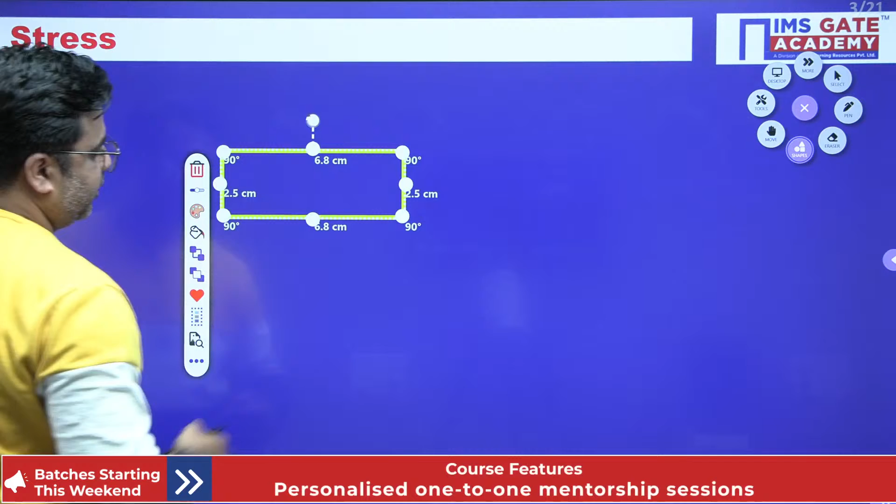Let us see this. Suppose this is my body, over this body I have applied some amount of load. This is the load that I have applied over this body. And which type of loading is this? This is a gradually applied load that we have already seen.

When you apply load over this body, it will try to undergo deformation, like this. This is the deformed shape of the body. In order to restrain this elongation or deformation, this body will provide the restraining force.

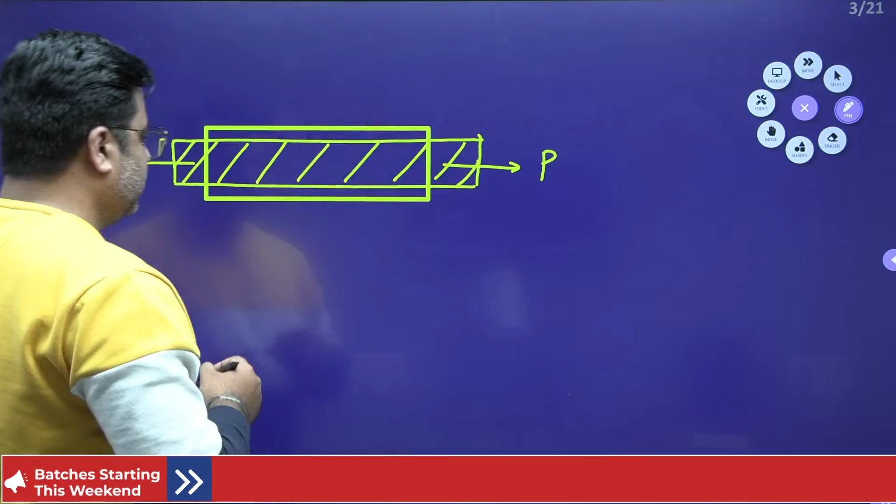So the restraining force that this body will provide - if you look into this cross section, in order to restrict whatever this load is doing to this body, there will be some internal resisting force that develops in the body like this. This internal resisting force will resist the effect caused by this external load P.

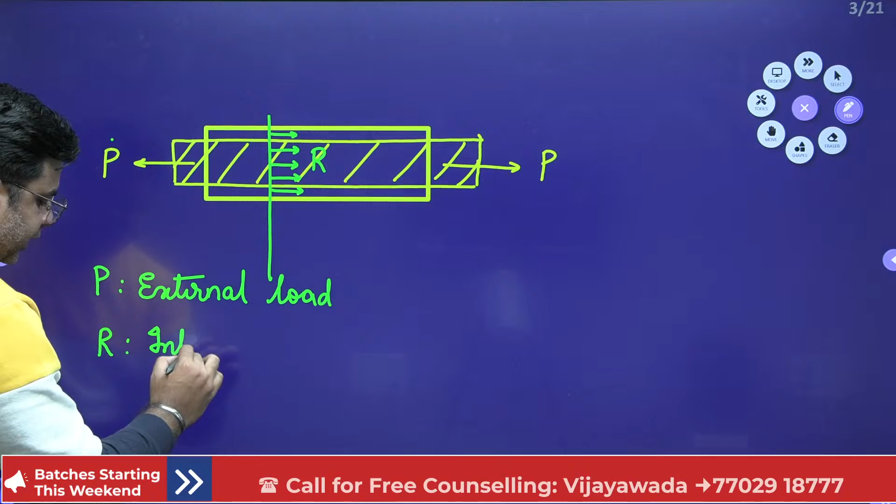P is my external load or external force, and R is the internal resisting force. This internal resisting force is developed to restrict the deformation of the body, which is caused by this external load.

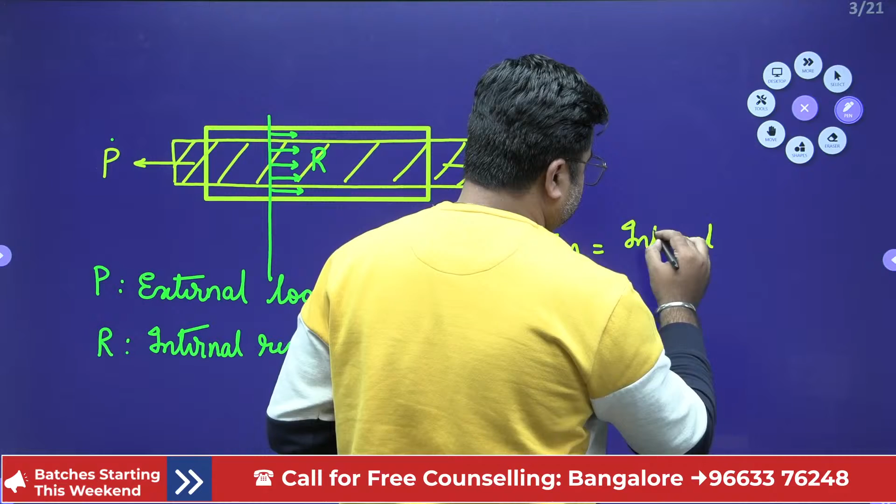This internal resisting force per unit area is termed as stress. So what is stress? Stress is internal resisting force per unit area.

Now, if you just consider the equilibrium of this system - this is my system, this is the section, this is the external load P. In order to restrict this deformation caused by this external load P, internal resisting force will develop inside this body. This is my internal resisting force.

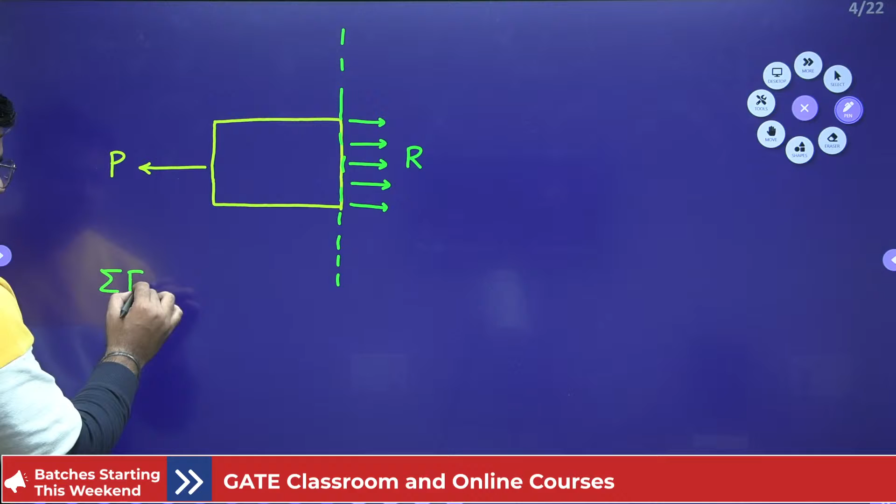Also, at the same time, the body should be in static equilibrium, which means that summation of horizontal forces should be equal to 0, which gives us P should be equal to R. So the internal resisting force is equal to the external load applied. That's why we write stress equals load divided by area.

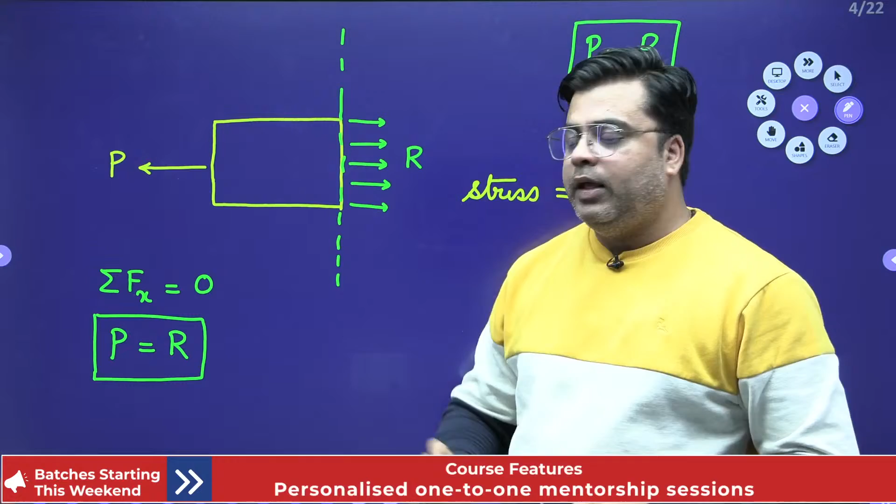Because this external load P is equal to the internal resisting force R, that's why we write this formula. But what happens usually is, when students see this formula, they try to figure out that stress is nothing but whatever load is applied per unit area. No. If I talk about the external load, external load per unit area is termed as pressure. But the internal resisting force per unit area is termed as stress.

I hope you got this clarity on this topic. So next time, if you see any statement in any technical examination, not just GATE, asking what is stress or to define stress, never mark it as load per unit area.

It will always be internal resisting force per unit area, and that is what we mean by stress. On the other hand, if I have to write pressure, pressure is external load per unit area. So this is the basic difference between stress and pressure: stress is internal resisting force per unit area, and pressure is external load per unit area.

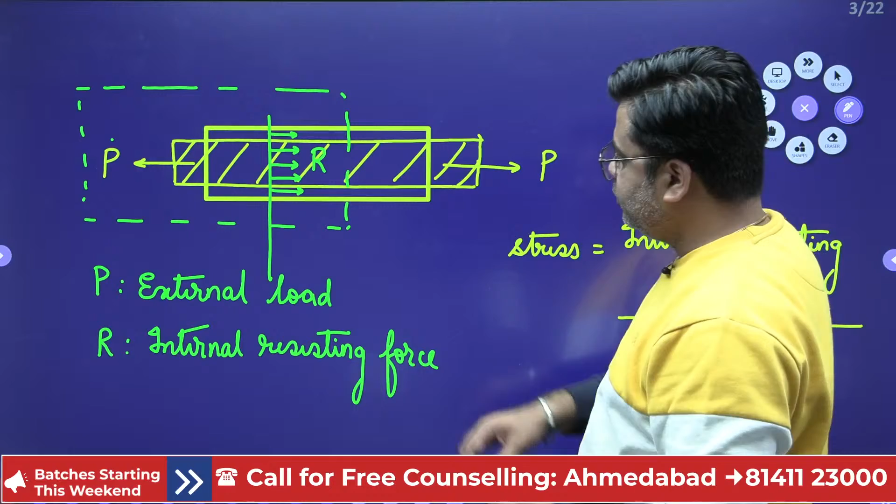Now, if you look into this diagram carefully, you will notice that initially the area of the section was A naught. Initially, this is my initial area, the area of the section was A naught.

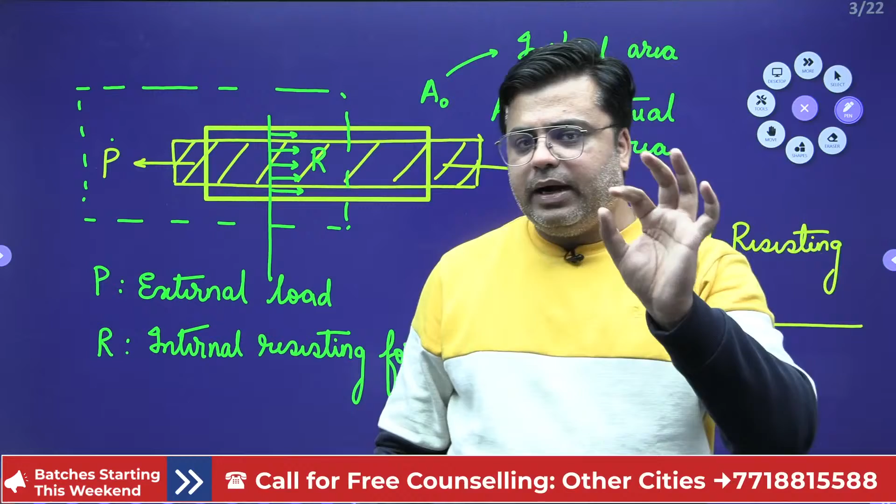When you apply the external load, this body undergoes deformation and some change in cross-sectional area is seen. So the instantaneous area is termed as A actual. This AA is nothing but the actual area when the body has undergone deformation, or the instantaneous area when the body is undergoing deformation. Meaning, at any time when the body undergoes deformation, the actual area is AA. The original area is A naught.

So the next question comes: sir, which area to use? You have told us that stress is nothing but internal resisting force per unit area, but which area to use, actual area or initial area? That is again one of the questions that usually confuses students.

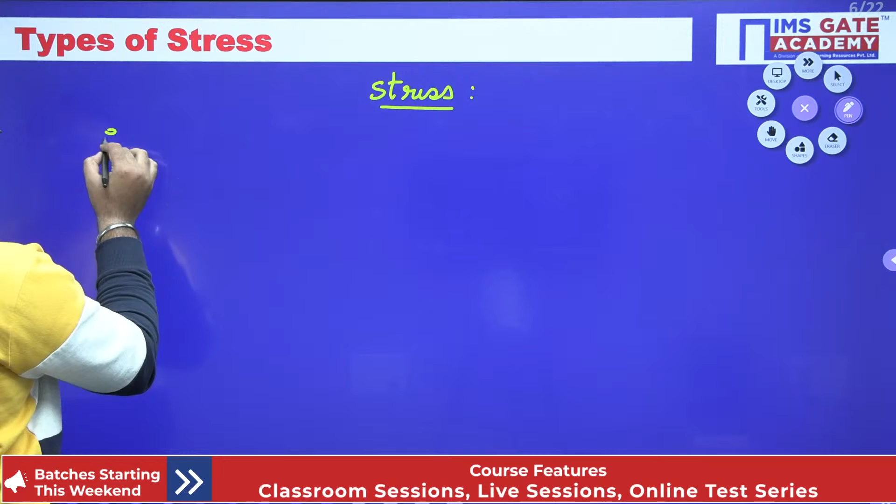Okay, so depending on the type of area we are using to calculate the stress, stress is defined differently. So the next topic of discussion is different types of stress. Depending on the type of area you are using, stresses are defined as two types. The first one is known as engineering stress or nominal stress.

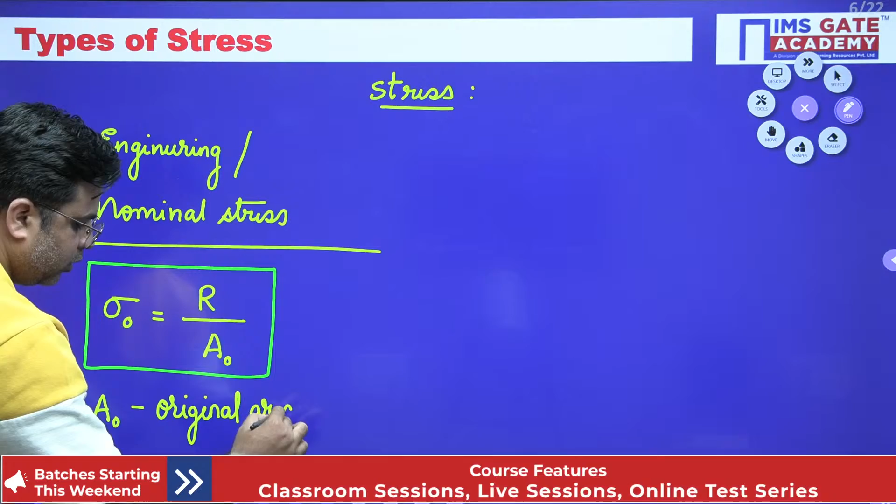For engineering stress or nominal stress, it is calculated as sigma naught equals resisting force per unit original area. So whenever you use the original area for calculating stress, that stress is termed as engineering stress or nominal stress. A naught is your original area.

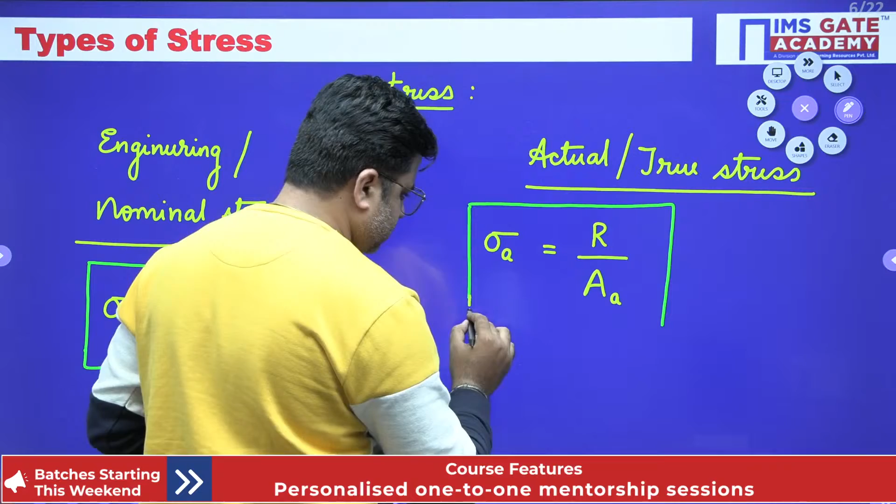But if you are using the instantaneous area or the actual area, that is the reduced area when you have applied tensile force, or the enlarged area when you have applied compressive force, that stress is known as the actual or true stress. Sigma actual, sigma A, equals the resisting force per unit actual area. AA is nothing but the actual or instantaneous area. So this is how we have usually defined the stresses.

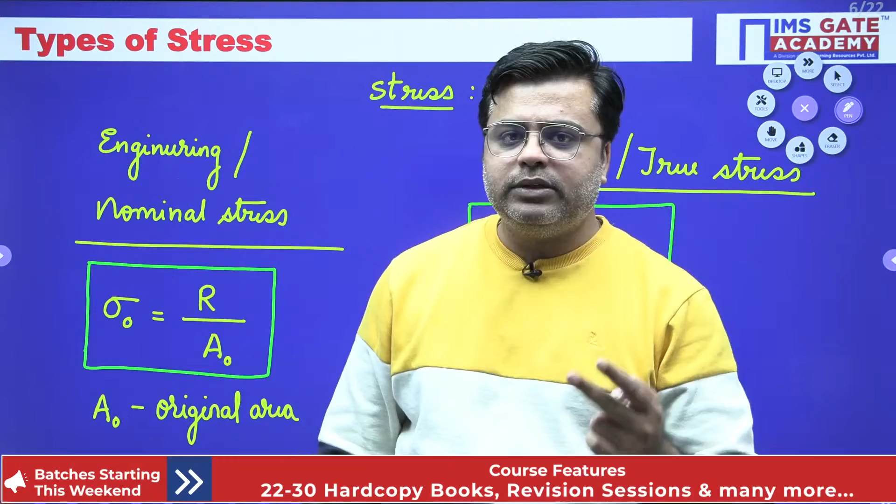In our entire calculation in strength of materials, we will be using engineering stress only, because we need to keep this area constant in our analysis. If you compare A naught with A actual, you will find there is not much difference. Though there will be some difference, it is not much. So every time we analyze any body, we will use engineering stress or nominal stress. Depending on the type of area we are using, stresses are classified as two types: engineering stress and actual stress.

Now, if you observe closely, let me consider the first case: suppose you have a body like this, and over this body you have applied a tensile load. So it is very easy to imagine that when you apply the tensile load over this body, this cross-sectional area will reduce.

If A naught is your actual original area, on applying the tensile load, this cross-sectional area will reduce. Now the new cross-sectional area looks like this. It is very much clear that this new cross-sectional area is the actual area.

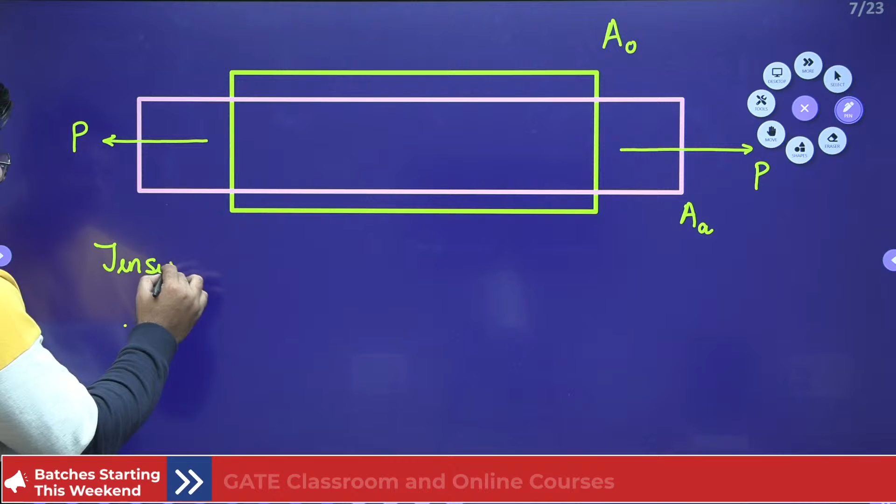So for the case of tension, your A naught is more than the actual area because the area is getting thinned. If A naught is more than A actual, when you write the engineering stress, which is sigma naught equals resisting force per unit original area, and the actual stress, which is resisting force per unit actual area, and A naught is more than A, clearly your engineering stress will be less than your actual stress.

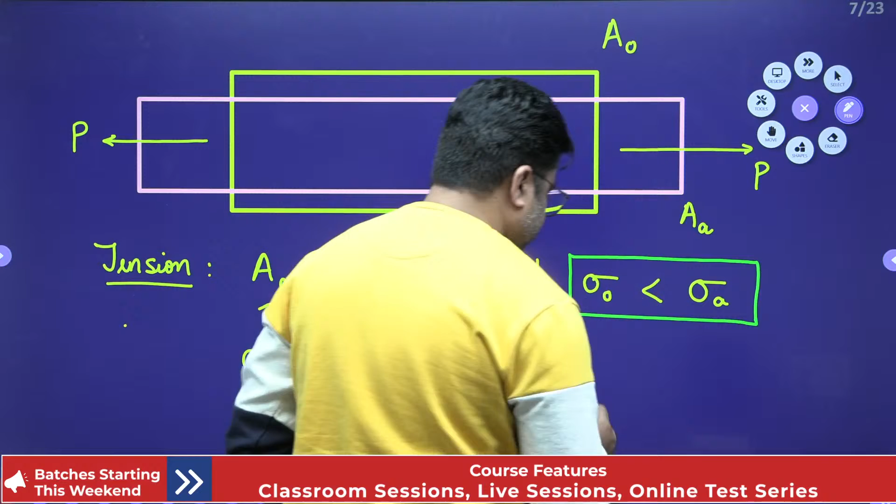So in case of tension, your engineering stress is less than the actual stress. Engineering stress is less than actual stress.

Similarly, if you consider the same body and apply the compressive force, you can clearly identify that if you apply compressive force over this body, this is my body. When you apply the compressive force P over this body, A naught is my original area, and on compressing, this cross-sectional area will expand, and the new cross-sectional area will look like this.

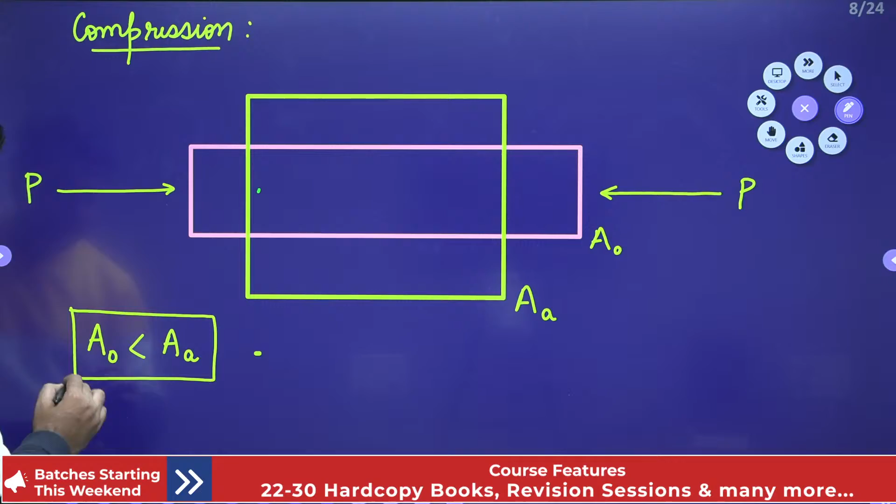This is my new cross-sectional area, and it looks like A actual. It is very much clear that A naught is less than A actual. So whenever I apply the compressive force, the cross-sectional area will increase, and that increased cross-sectional area is A actual.

If my A naught is less than A actual, then my engineering stress, written as resisting force per unit original area, and my actual stress, resisting force divided by actual area, if A actual is more than A naught, then my sigma actual will be less than sigma naught. So sigma naught is more than sigma actual.

So this is the relation between the actual stress and the engineering stress when you apply tensile load and compressive load. I think this is very simple to you. All these basics are required in order to analyze any structure.

This should be clear in your mind whether that load will increase the area or decrease the area. So if any question states that if you apply the tensile load, which stress will be more? Obviously, your actual stress will be more. And when you apply the compressive force, which stress will be more? Your engineering stress will be more. So like that you can identify.

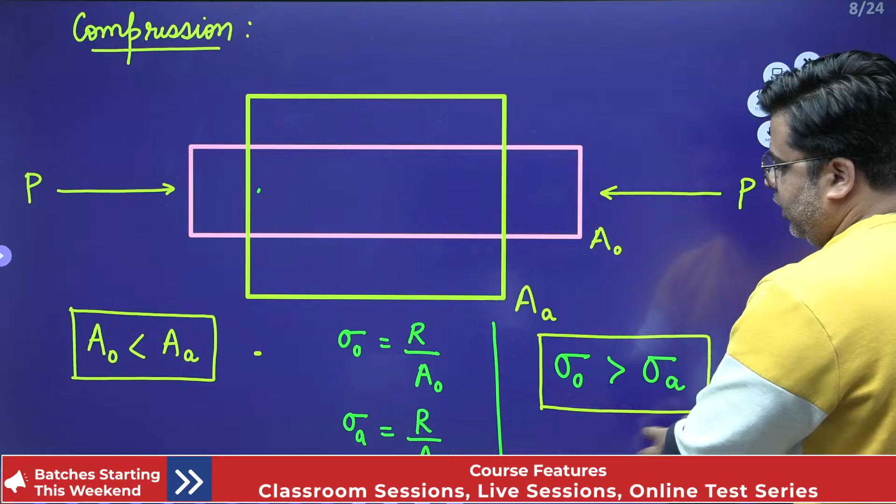Okay, so these are some of the basics about engineering stress and actual stress. Moving to our next topic, which is strains. First, understand what we mean by strain. I have already told you this, when over a body you apply the load. So if this is my body, on applying the load like this, this is the external load that I have applied. L naught is the length of the body.

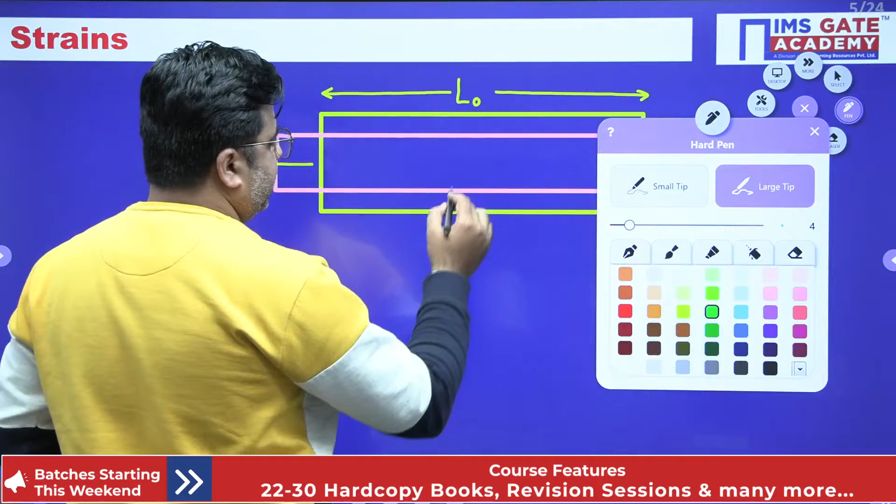On applying this load, this body will deform and you will see the increase in length of this body, like this. So this is the increase in length of the body. Now the new length is L dash. Originally, L naught was the length of the body. Now L dash is the new length of the body after it undergoes some deformation.

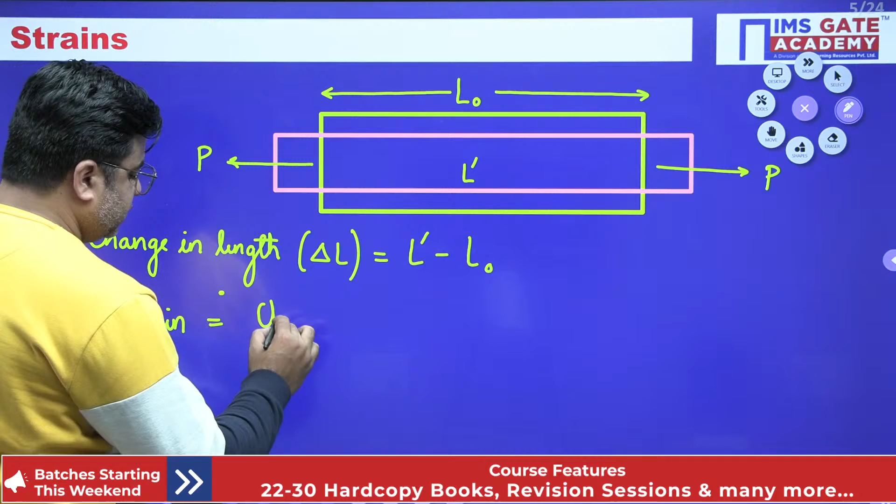So this change in length that happened, delta L, is equal to L dash minus L naught. The strain is defined as change in length per unit length. This change in length is nothing but delta L by length.

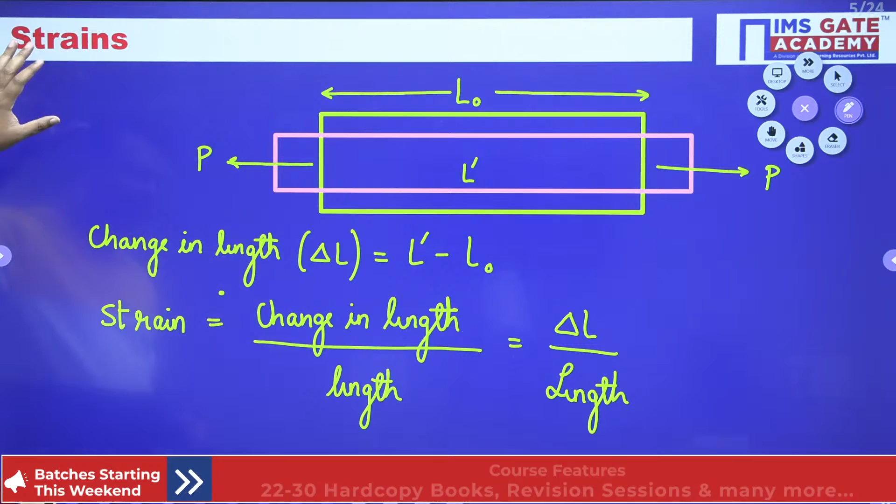Now again the question comes: which length should I use to calculate the strain? Strain is defined as change in length per unit length. Depending on the type of length we are using, this strain is defined into two categories. Let me define this strain into two categories.

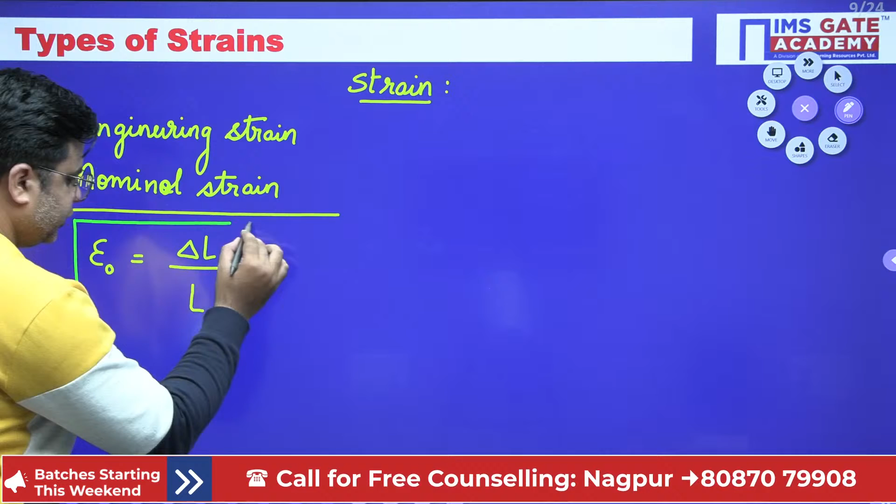So depending on the type of length you are using, this strain is also defined as engineering strain or nominal strain. Engineering strain or nominal strain is defined as epsilon naught equals change in length delta L divided by the original length L naught. So your engineering strain is change in length per unit original length, where L naught is your original length.

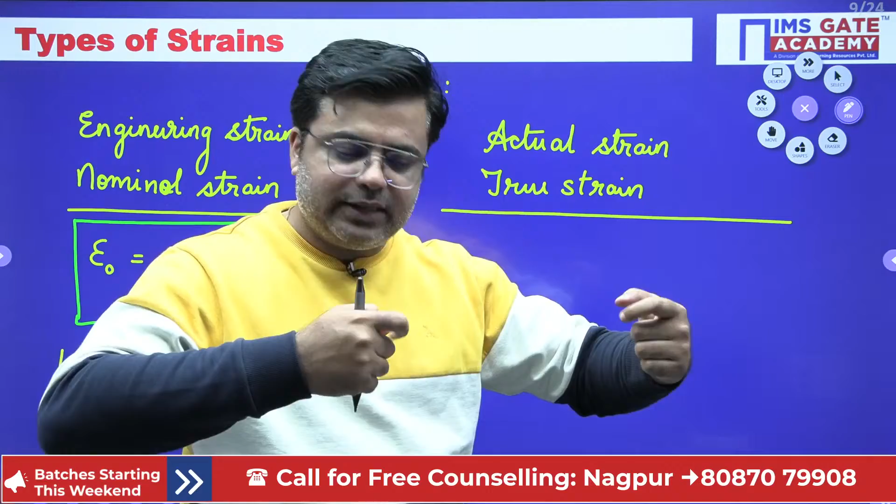Similarly, the other variety of strain is known as the actual strain or the true strain. When we use the actual length after deformation, that is the instantaneous length L dash, that type of strain is known as the actual strain or true strain. This actual strain is defined as epsilon A, which is change in length divided by the instantaneous or actual length L dash. So this actual strain is change in length per unit actual length.

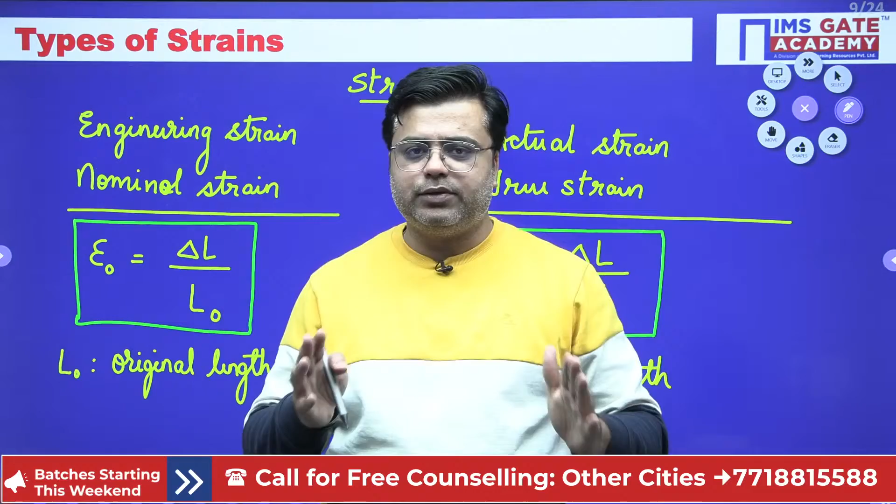So this is how you have defined the different types of stresses and strains. Depending on the type of area you use to calculate stress, you have engineering stress and actual stress. Similarly, depending on the type of length used to calculate strain, these strains are broadly classified into two types: actual strain and engineering strain. So this is the classification.

Now talking more about this actual strain and engineering strain, the relation between true stress and engineering stress. Before that, observe closely: this actual strain, which is delta L by L dash, this is your actual strain that we exactly want.

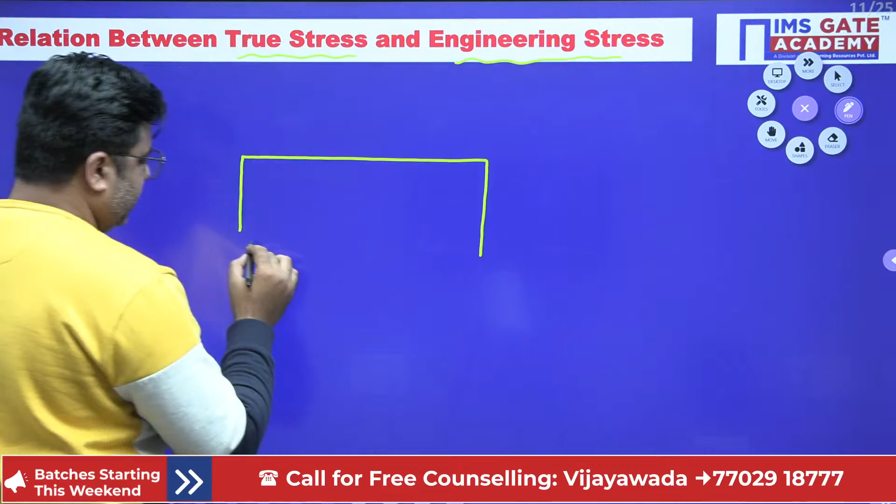Now moving on, you have one relation between true stress and engineering stress. Observe this very carefully. If you have an elastic body, on applying load over this elastic body, it will undergo some deformation and you see the change in length of this body. So this is your elastic deformation.

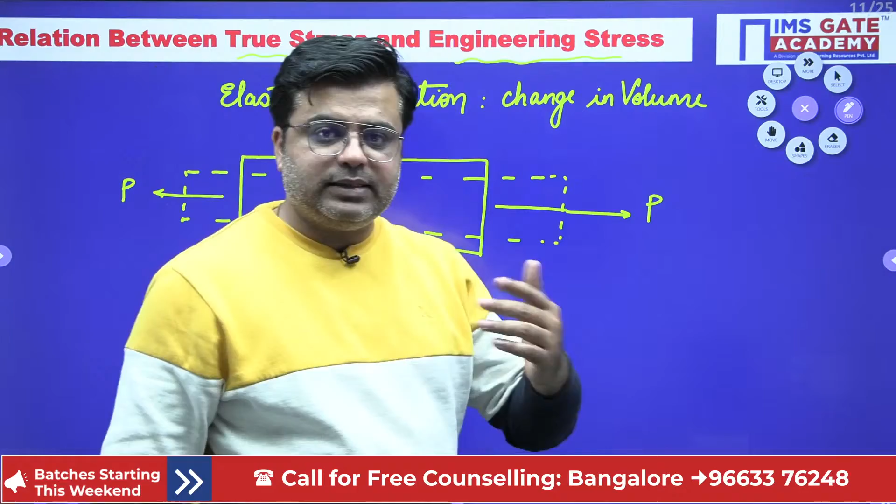For elastic deformation, since both length and area are changing, we see the change in volume of the body. Whereas if the same body is analyzed under plastic state, the volume remains constant, and corresponding to that constant volume, you see the change in dimensions of the body. So in plastic state, your volume is constant.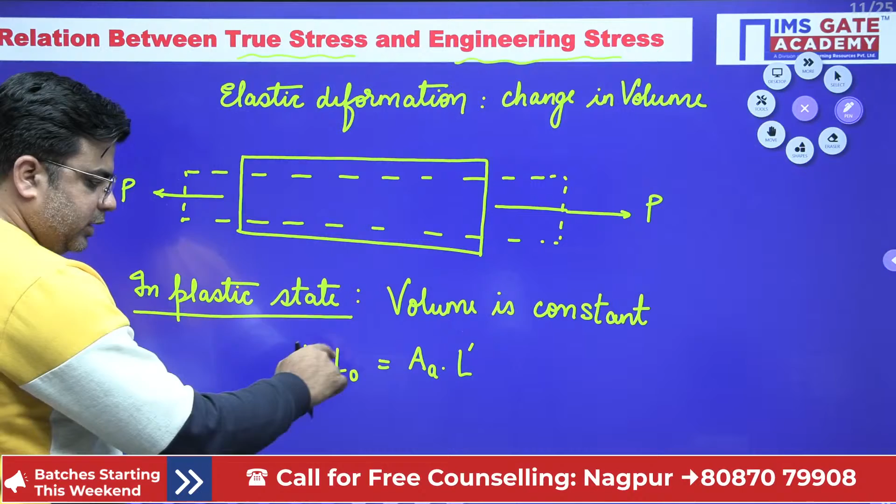So we can write that your initial volume, A naught into L naught, should be equal to A actual into L dash. So A naught into L naught is your original volume, and A actual into L dash is your instantaneous volume, that is, after deformation, whatever will be the volume of the body.

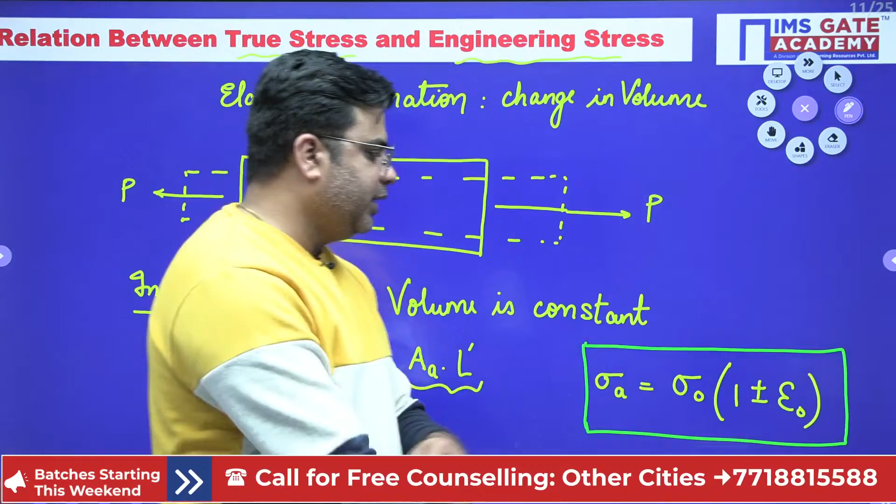When we look into the relation between actual stress and engineering stress, you have this relation: sigma actual equals sigma naught into 1 plus minus epsilon naught. There is a derivation regarding this, so you need to keep a check: under plastic state, when volume is constant, A naught L naught equals A actual into L dash. This is the relation between actual stress and engineering stress. You can derive this, but right now the derivation is not that important, so for now you can just have this relation directly.

Though we have derived this relation through the plastic state, this relation also holds good for the elastic state. I hope you have got this. You can just note this down quickly so that we can move on.

Chalo, moving on with this.

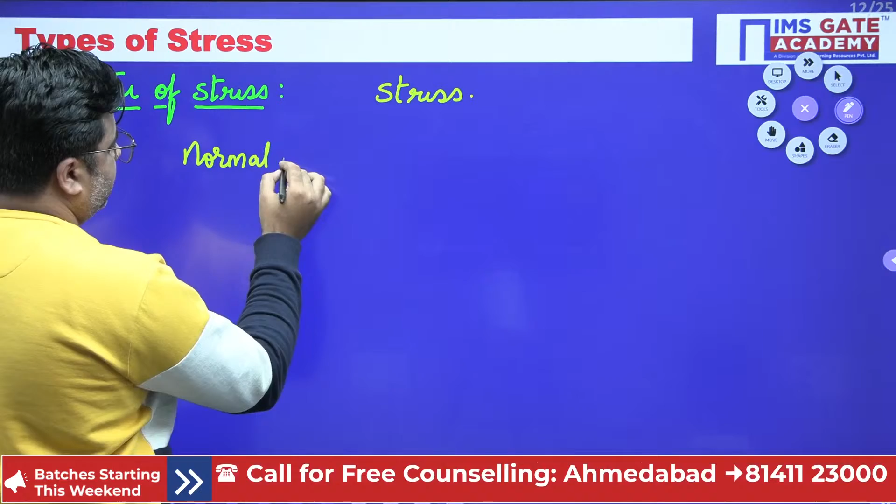Depending on the type of areas and length we use, we have defined different types of stresses and strains. Now there is one more classification of stresses, totally dependent on the nature of stress. With respect to the nature of stress, stresses are classified into two types: the first one is normal stress, and the second one is shear stress.

Now observe this. If this is my cross section, and over this cross section the stresses are acting perpendicular to the cross section, this is my cross section XX. If the stresses are acting perpendicular to the cross section, then this type of stress is termed as normal stress.

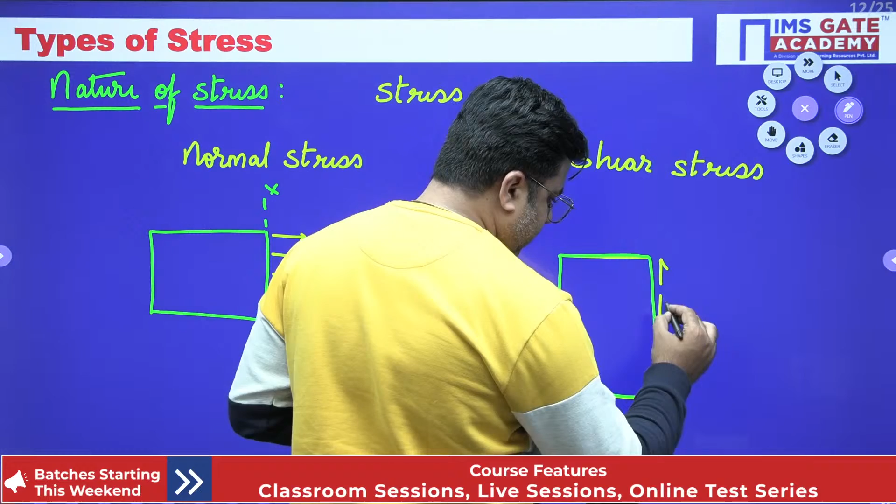Similarly, if you again consider the cross section like this, this is my cross section. For this cross section, if the stresses are acting along the surface, then this type of stress is termed as shear stress. So if the stresses act perpendicular to the surface, they are normal stress, and if the stresses act along the surface, they are shear stress.

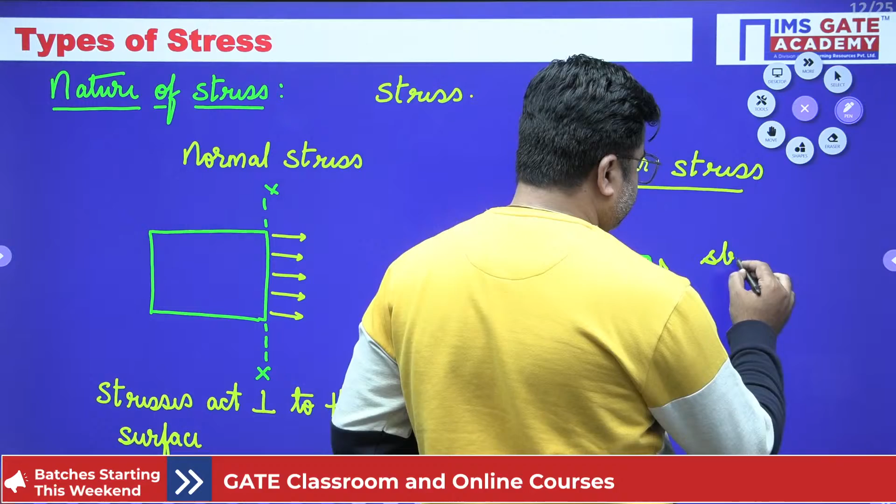So for normal stress, stresses act perpendicular to the surface. And for shear stress, stresses act along the surface.

You can visualize these two types of stresses by observing this. Suppose this is the load acting over the body - this is the direct load acting over the body. In order to resist the effect of this load P, stresses will develop perpendicular to the surface like this. So these are your normal stresses.

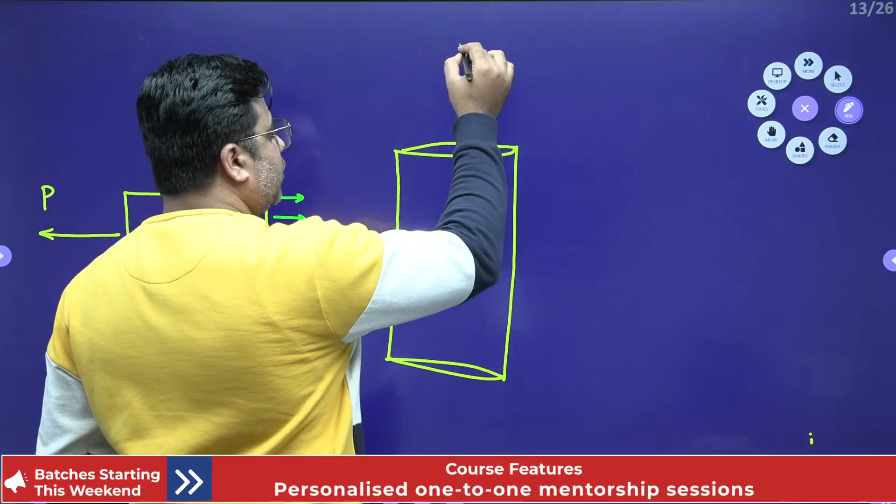Similarly, if you consider a cylindrical column like this, the load is acting perpendicular to the surface. If you consider any section, the internal resisting force will be developed like this, producing stress perpendicular to the cross section. Whenever stresses are produced perpendicular to the cross section, these type of stresses are known as normal stresses.

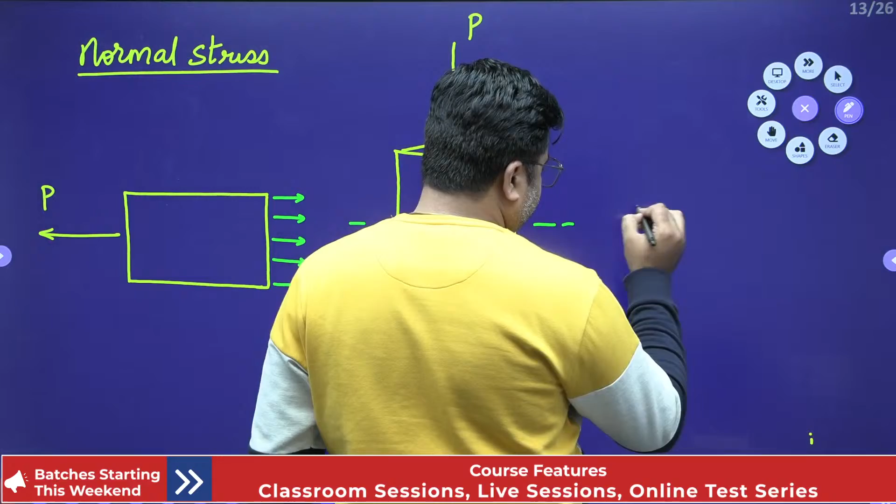Similarly, one more variety of normal stress is there. If you observe this beam, this is the cross section of the beam, and over this beam a bending moment M is applied like this.

So due to this bending moment, these lower fibers will be under compression, and these upper fibers will be under tension. So if you just cut any cross section...

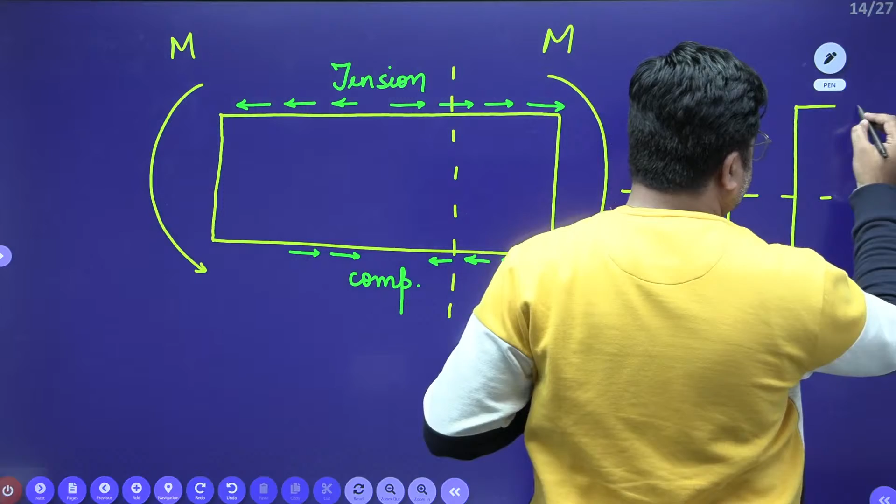...and draw the stress distribution for this cross section - this is my cross sectional area. For this cross sectional area, if I draw the stress distribution, the upper fibers, that is the fibers present above, are under tension.

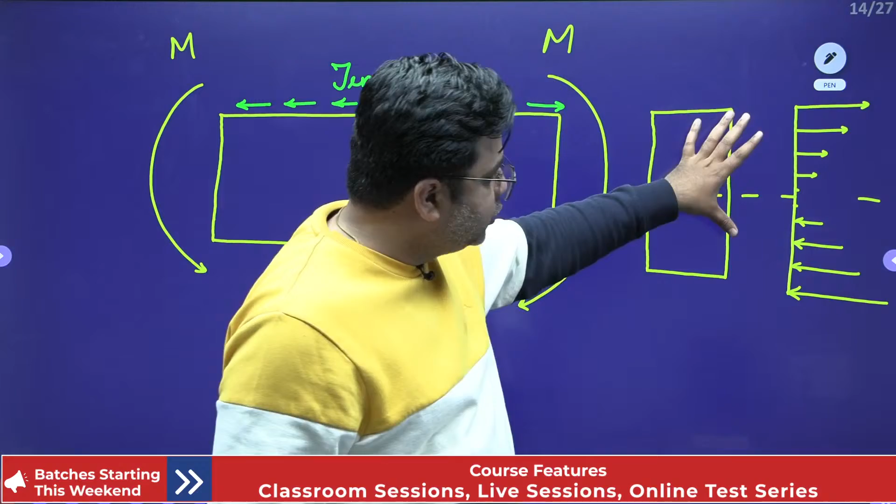And this tension is decreasing like this. The lower fibers are under compression, and this compression increases from the neutral axis, from the center point, to the extreme fibers. As you move above from the central point, the normal stresses are increasing. Similarly, as you move down from the neutral axis, the normal compressive stresses are increasing. This is the stress distribution for a beam under bending.

So when you observe the beam under bending, you will find that if the beam bends like this, this moment has a tendency to bend the beam like this.

If the beam is bending like this, the upper fibers will be under tension and the lower fibers will be under compression. If we plot the stress distribution, the upper fiber stress is increasing from the neutral axis till the uppermost fiber, and similarly for the lower fibers under compression. So this entire thing is under tension. This is tensile stresses,

and these are compressive stresses. When you look into the stresses and how they are acting, if this is my cross section, these stresses are acting perpendicular to the cross section. And since the stresses are acting perpendicular to the cross section, it is very easy to define them: the stresses which are acting perpendicular to the cross section are termed as normal stresses.

Okay, so based on these two diagrams, I'll just define this. Normal stresses are again of two types. First of all, what are normal stresses? Normal stresses are those stresses which act perpendicular to the cross section.

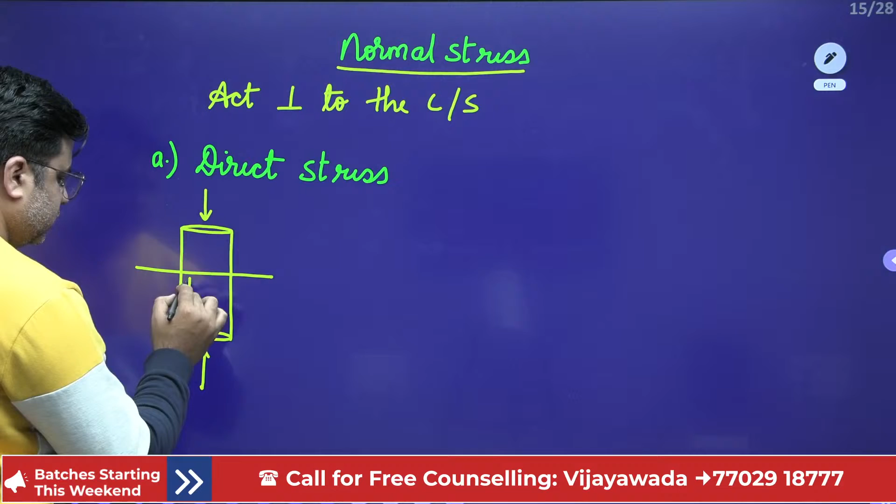So normal stresses are of two types: direct stress, where the load is applied directly over the cross sectional area. This load will cause compressive stresses in the entire cross section, and the same amount of compressive stress is developed throughout. So these type of stresses are known as direct stresses.

The second type of normal stresses is known as bending stresses. We have just now seen, if you consider any beam like this and apply a bending moment like this, you get the stress distribution like this. So this is my stress distribution. The upper fibers are under tension, the lower fibers are under compression.

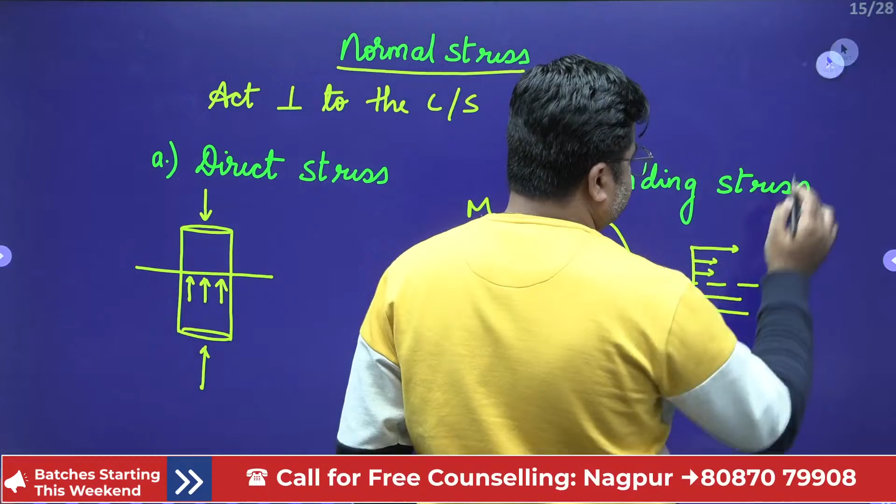So this is under tension and this is under compression. But all these stresses are acting perpendicular to the surface, hence they are defined as normal stresses. So direct stresses are also of two types: tensile direct stress or compressive direct stress. Similarly, your bending stresses will also be of two types: tensile bending stress and compressive bending stress.

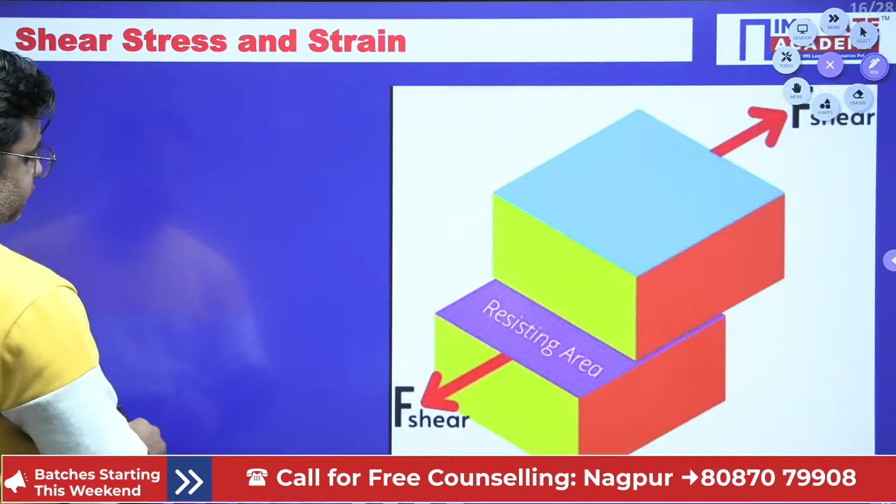Okay, moving on, the next type of stress is known as shear stress. As the diagram shows, you have these two blocks. When you apply the shearing force, that is, force which is along the surface, this force F is along the surface. And this violet area is the resisting area which resists this shear force F acting along the surface.

So if the force is acting along the surface, that force is termed as the shear force. First of all, if the force is acting along the surface, it is termed as shear force.

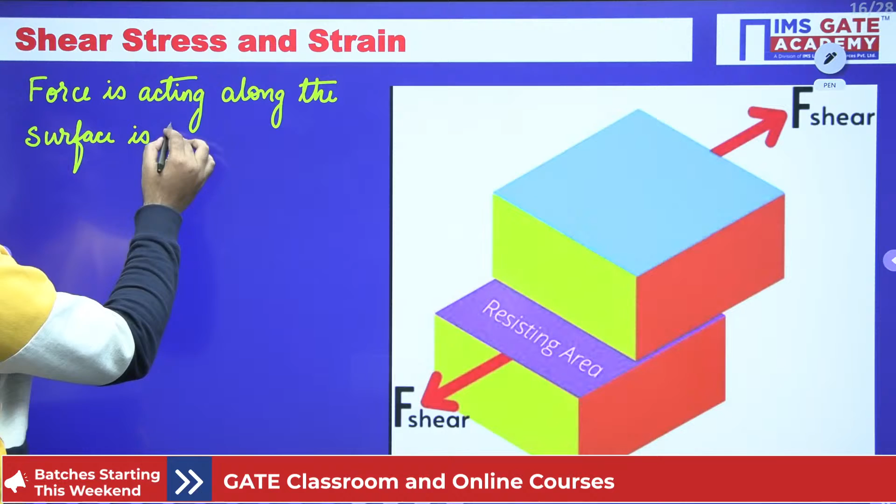So if this force is acting along the surface, what you have to do is place your hand over this block and slide it in this direction. If you are sliding this block in this direction, it is easy to imagine how the shear force will be acting over this block. In order to restrict the deformation caused by this force, this cross-sectional area will be used.

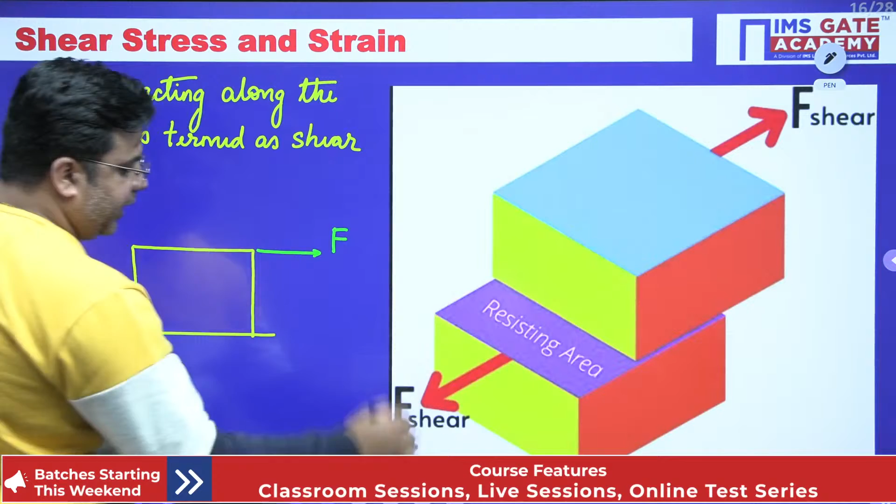Okay, so I'll draw this. If this is my block earlier, and this is the kind of force I am applying, this force will try to deform this block, but this area which is present will try to restrict the effect caused by this force. So the shear stress is defined as the shear force per unit of this resisting area. This area that I have drawn is termed as the resisting area.

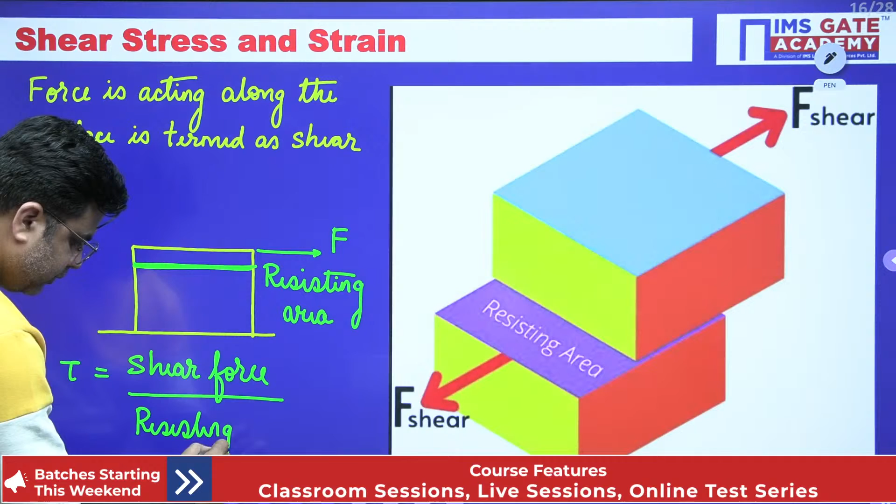So shear stress, denoted by tau, is defined as the shear force divided by the resisting area. Once again, if you have this block, this is the block that you have.

Over this block, if you apply the shear force like this, this shear force will try to deform this section, and this deformation will happen like this.

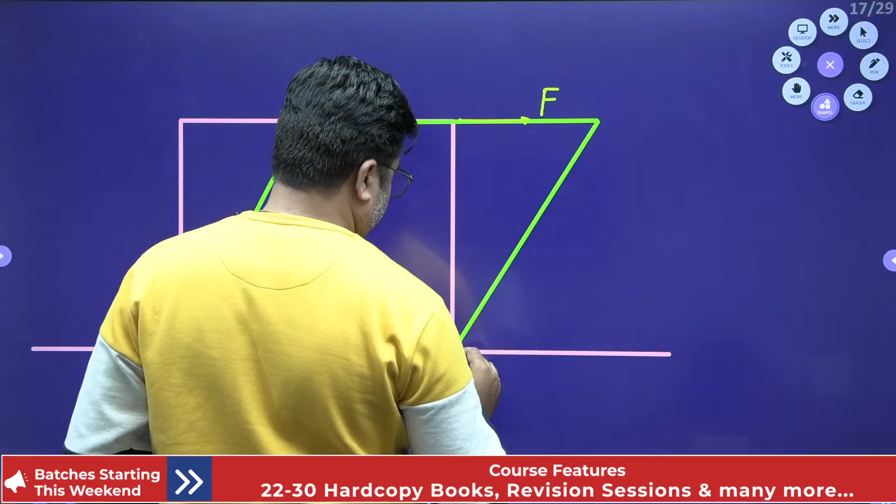So this is the kind of deformation that will be happening due to this force. If this is my height H, this is the change in length delta L, right? This is the change in length delta L that happened because of this block getting tilted by some amount.

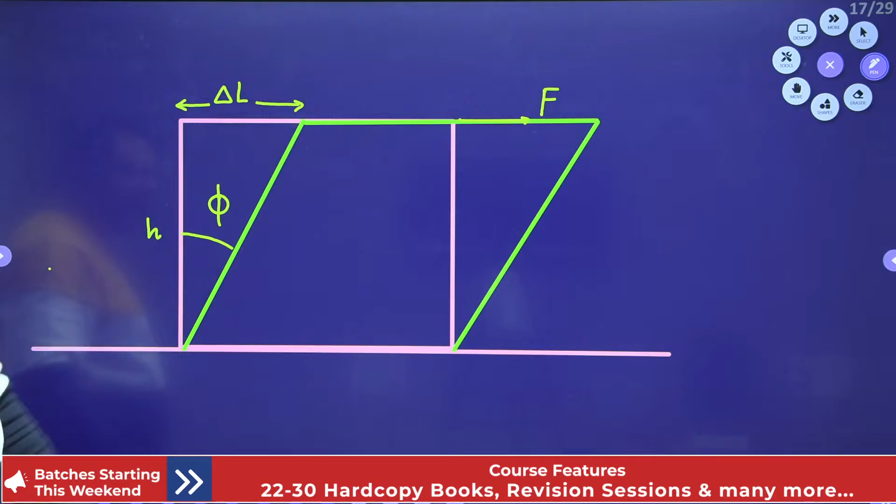So this angle is termed as your shear strain. This angle of tilt that happened when you have applied the shear force over the block is termed as your shear strain. So shear strain is nothing but delta L by H. This H is your height of the block and delta L is this change in length, right?

And obviously this delta L will be equal to this delta L. So this is also delta L, and this is also phi. And this phi is nothing but your shear strain, defined as delta L by H. So whenever you apply the shear force on any body, this body will deform in this fashion, and the angle of tilt is termed as your shear strain, equal to delta L by H. So I hope shear stress and shear strain is clear to you.

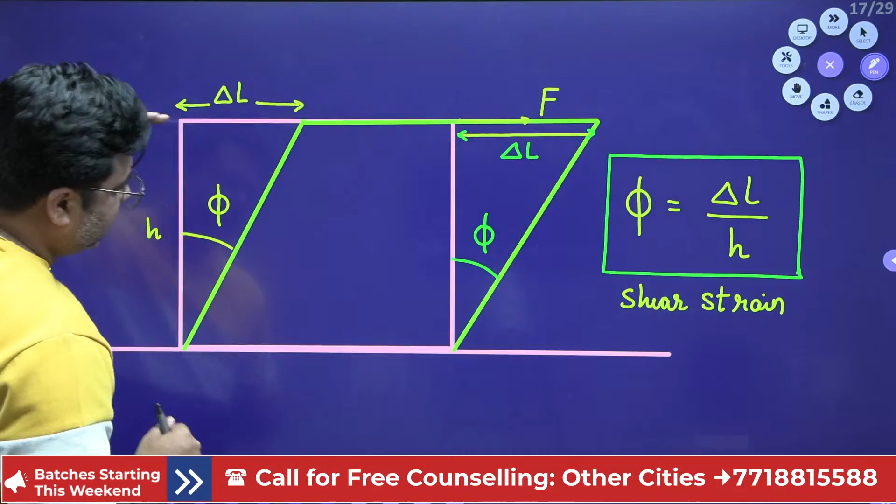Whenever you need to calculate the shear stress, you will use that area which is restricting or resisting the effect of this force. This is my resisting area that will resist the effect of this shear force F. So the shear stress is defined as the shear force per unit area.

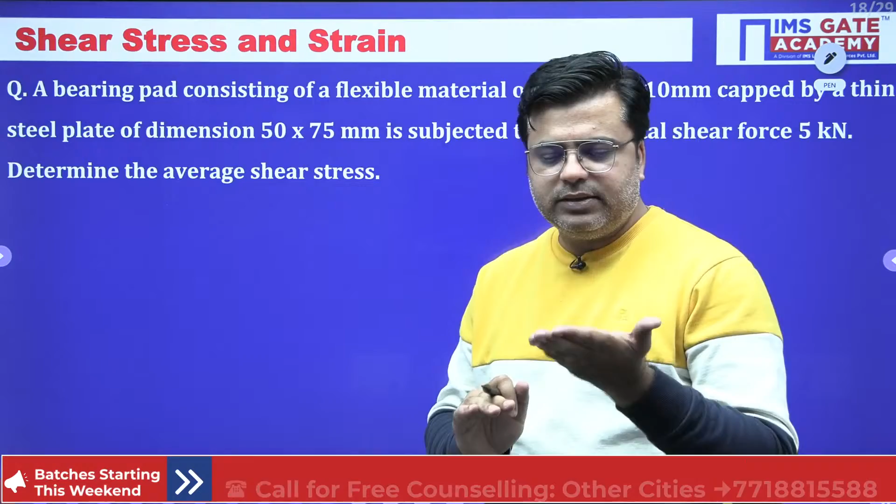So here is one question, again a simple question to develop your basics. The question says a bearing pad consisting of a flexible material. What is a bearing pad? It is that pad which absorbs shock or impact loading. So any pad which can absorb load is termed as a bearing pad. You can imagine a pad of rubber - if you drop anything over it, it will absorb that impact or shock loading.

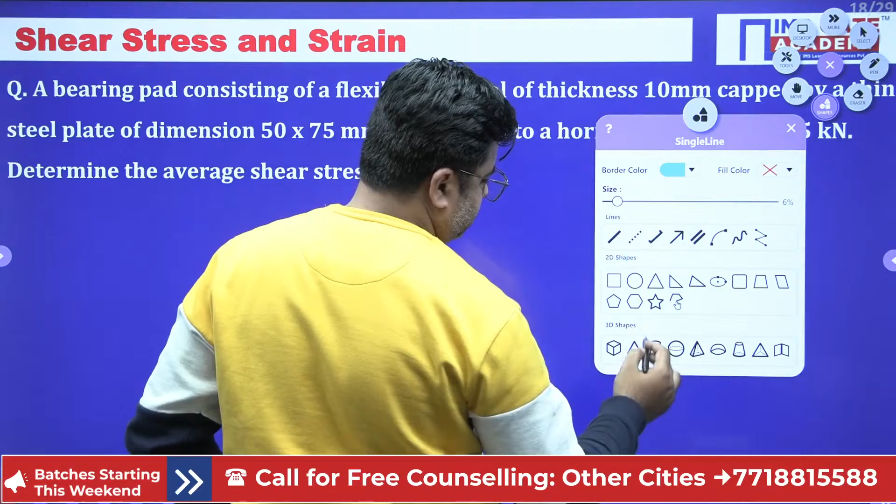So you have one surface like this, this is my surface. Over this surface, you have a bearing pad, and this is flexible. This is a flexible pad, meaning it can just move like this. Just imagine this as a rubber pad, nothing more than that.

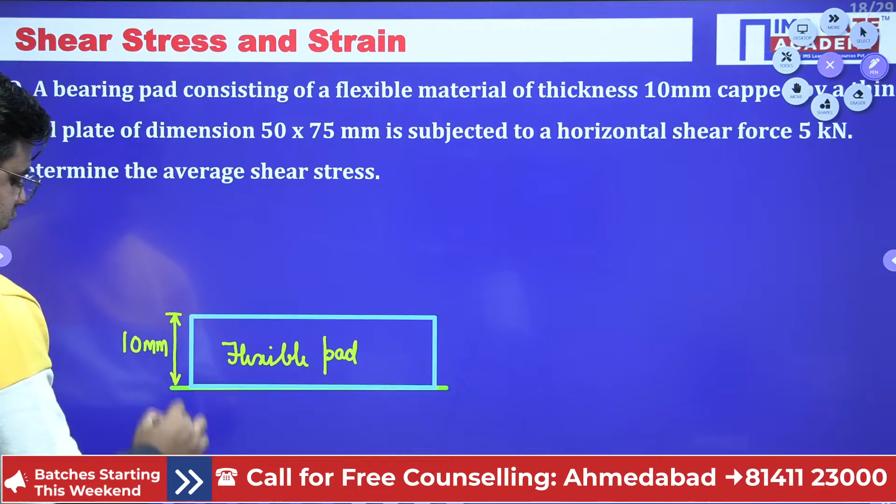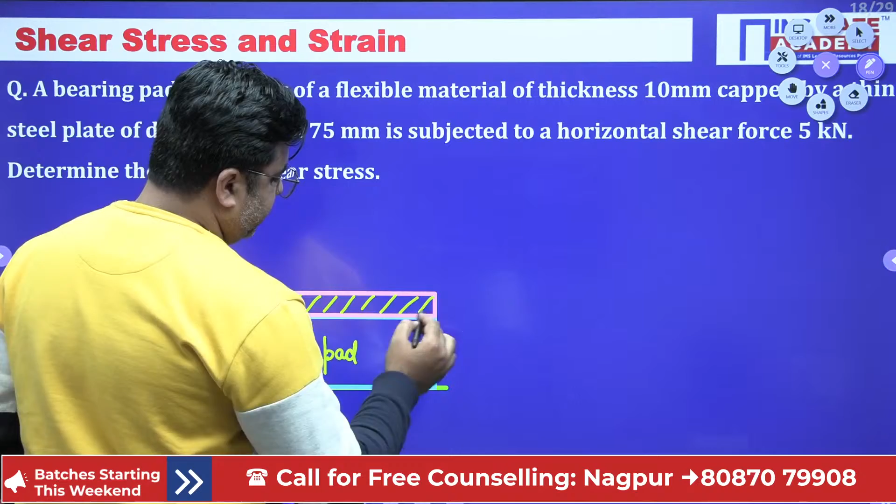So a bearing pad consisting of a flexible material of thickness 10 mm - this thickness is 10 mm - is capped by a thin steel plate of dimension 50 by 75 mm. So above this you have a steel plate, and the dimensions of this steel plate are 50 by 75 mm.

It is subjected to a horizontal shear force of 5 kilonewton over this steel plate. So when this steel plate is attached to this bearing pad, the steel plate will try to move in the forward direction, but this bearing pad will try to restrict the motion of this steel plate.

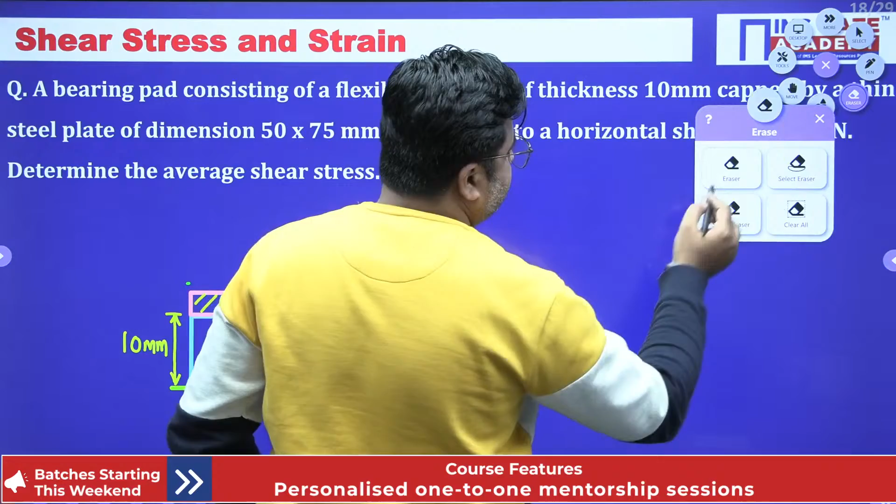So when you look into the final picture, this steel plate will bend this flexible pad. This is the new position of your flexible pad, which is deformed by some angle phi. So there is some amount of shear strain that happened over this flexible pad when it moved by some amount phi, and some amount of shear stress that came over this flexible pad.

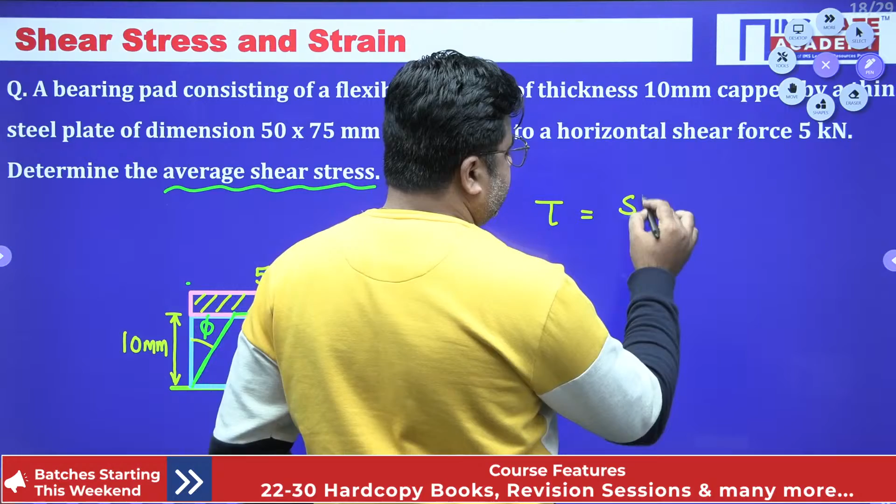Now the question is asking to determine the average shear stress. This question is very simple. So your average shear stress tau is equal to the shear force per unit resisting area.

Shear stress is equal to shear force per unit resisting area. Shear force is given to us as 5 kilonewton, so I'll write this as 5 into 1000. The resisting area is the area resisting the effect of shear force, which is 50 cross 75. So this numerator is in Newton and denominator is in mm, so you can calculate mm square and get the shear stress in Newton per mm square.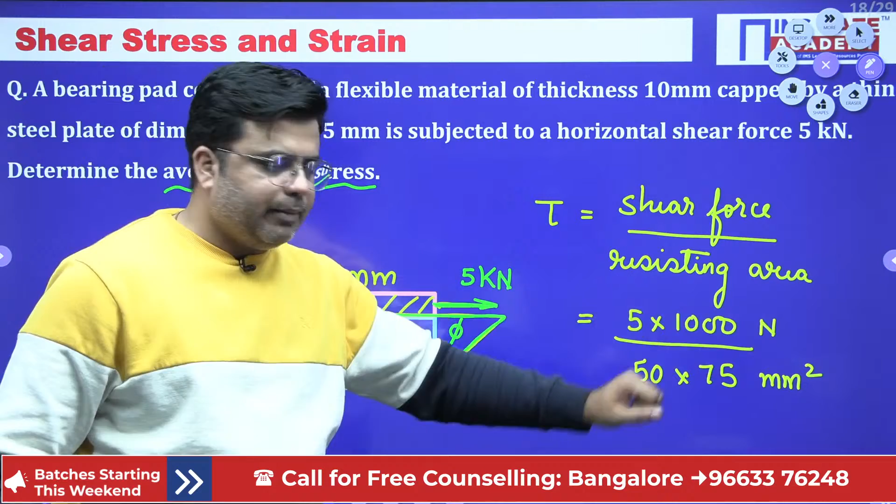Let's do the calculation quickly: 5000 divided by 50 into 75. So this shear stress comes out to be 1.33 Newton per mm square.

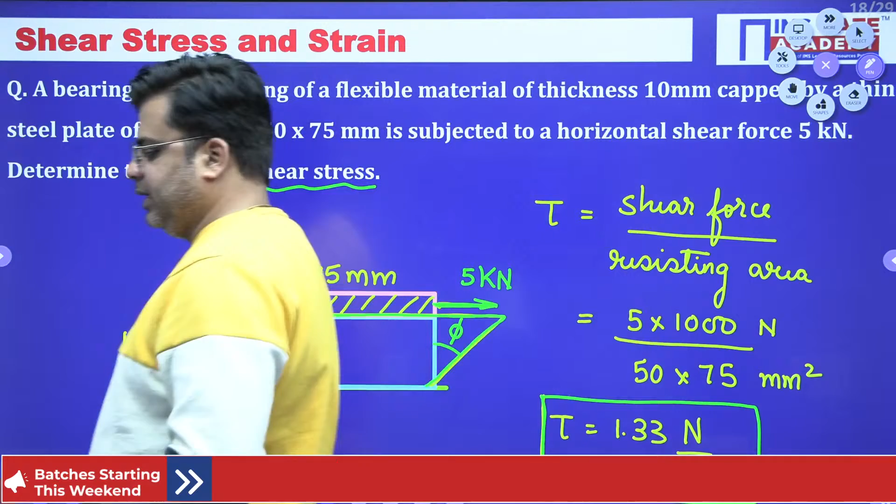So this is the average shear stress that is developed over this flexible pad. I hope this question is very much clear to you, and this question is easy for you. Moving on with this, I would like to discuss two units.

If you look into the unit of stress, stress is resisting force per unit area. If the resisting force is in Newton and area is in meter square, this is one of the units of representing stress. This Newton per meter square is also known as pascals. So the unit for measuring stress is pascals, and 1 pascal is equal to 1 Newton per meter square.

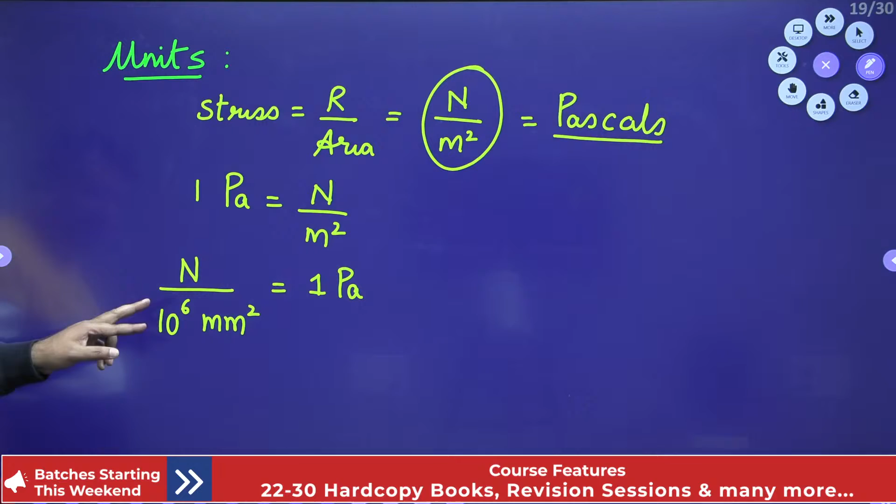Just convert this meter square into mm. In order to do that, this is Newton divided by 10 raised to power 6, into mm square, and this is equal to 1 pascal. So 1 N divided by 10 raised to power 6 mm square equals 1 pascal. Take this 10 raised to power 6 to the other side: 10 raised to power 6 pascal equals Newton per mm square. Wherever 10 raised to power 6 is there, you write it as mega. So 1 Newton per mm square is equal to 1 megapascal.

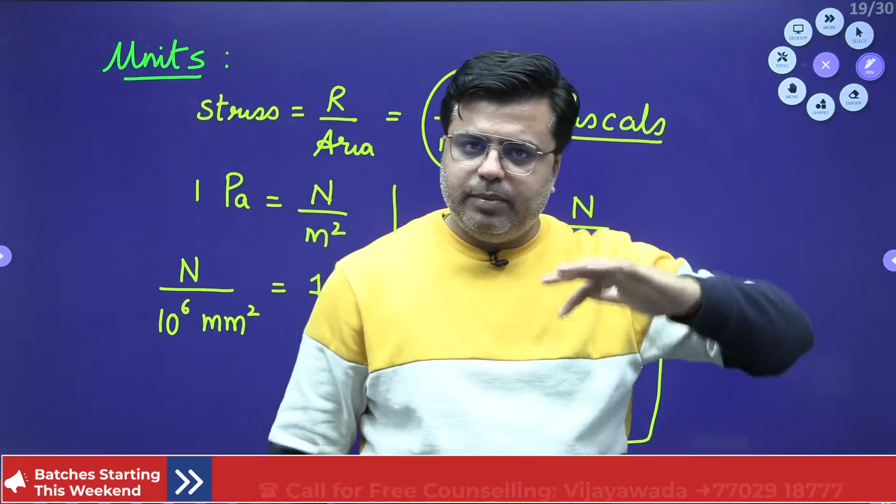So these two relations you should keep in mind: the unit for measuring stress is pascals, and 1 pascal equals Newton per meter square. When you convert meter square into mm square, you write 10 raised to power 6. So Newton divided by 10 raised to power 6 mm square equals 1 pascal, and from here we get 1 Newton per mm square equals 1 megapascal.

Similarly, if you look into the unit for strain: strain is change in length divided by the original length or whatever length - original or actual, it doesn't matter, that just defines the type of strain. So strain is change in length per unit length. If you write the units of these two, it will be either meter per meter or mm per mm. These two units cancel each other, and you find that strain is unitless.

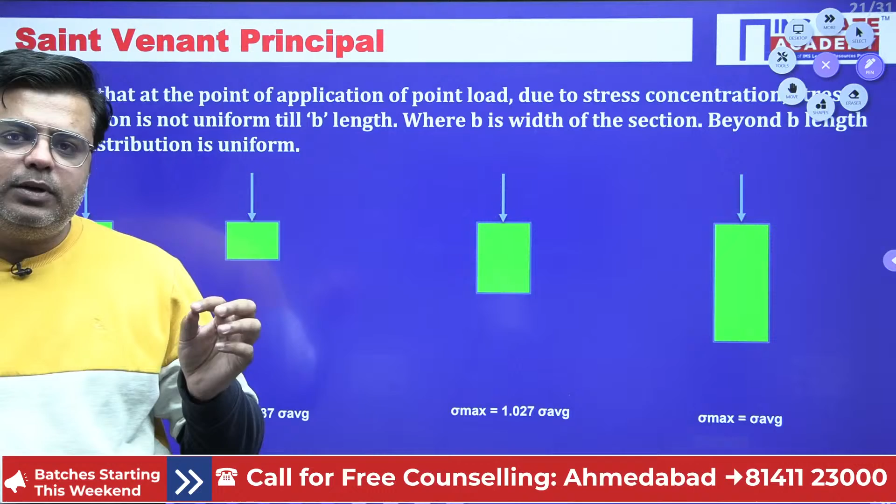Now moving on to our next principle, which is again an important principle known as Saint-Venant's principle. Although the effect of Saint-Venant's principle will not be considered in the entire theory of strength of materials, you should be aware about this fact. This principle is for stress concentration - Saint-Venant's principle defines stress concentration.

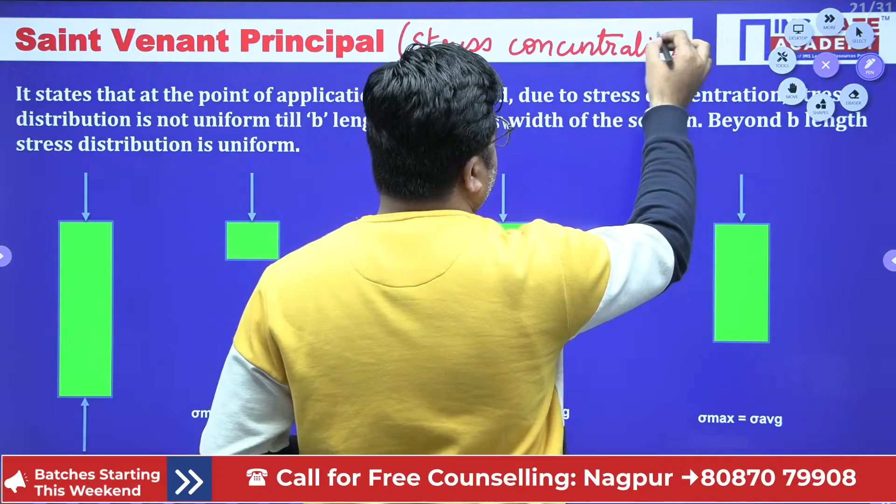Now, what exactly is stress concentration? Here I have considered one example.

When you apply load P over this body, how do we apply this external load? You will hold the body from this point and pull it. For suppose this is my body, if I have to apply the point load, I will hold this body and apply tensile or compressive load, whatever I want.

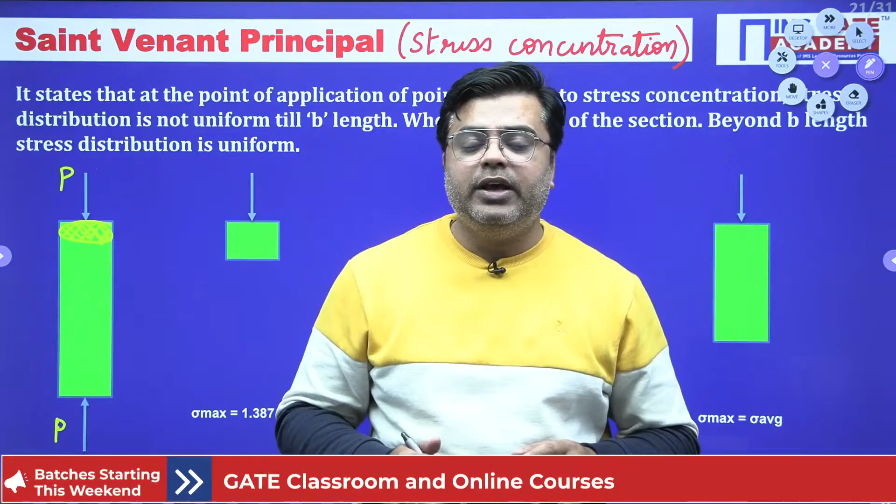So whenever we are holding a body from a particular point and applying the point load, in this area, stress concentration takes place. What is stress concentration? It means your stress will not be uniformly distributed across the cross section.

If you cut the cross section at a distance of b by 2, you will find that your stress varies like this. This is your stress variation, at a distance of b by 2, where b is the width of the member.

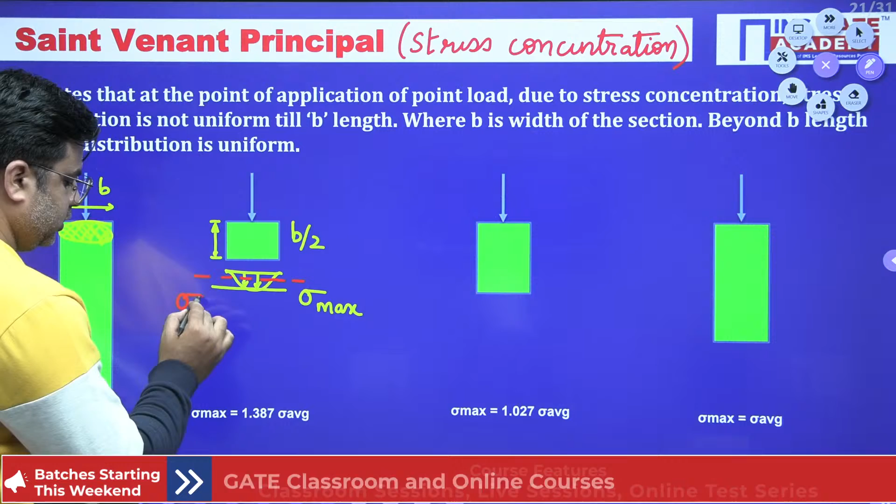If you go at a distance of b by 2 along the length, your stress varies like this, and this is your maximum stress, and this is your average stress. So your sigma max is equal to 1.387 times the average stress. This means the variation between maximum and average stress is more when you have moved down by the amount of b by 2 length in this member.

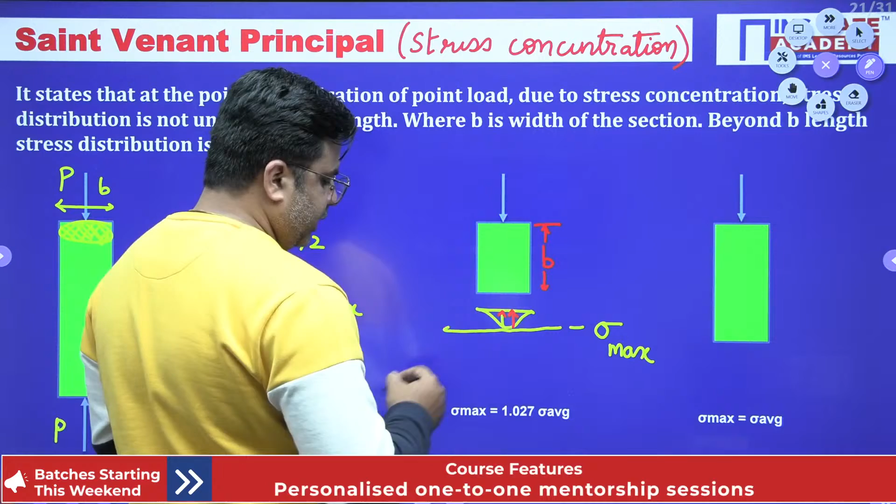If you move by the amount of b length in this member, you will again see stress concentration, with somewhat the same variation. This is the stress concentration we have, but this time the maximum stress is only 1.027 times the average stress.

Finally, when you move 3b by 2 length inside the member, your stress variation will be uniform throughout the cross section. So whatever theory we discussed, that stress is uniform across the cross section in case of point load or direct loading, is only applicable when you have moved 3b by 2 length inside the member. Till this length, you will have stress concentration.

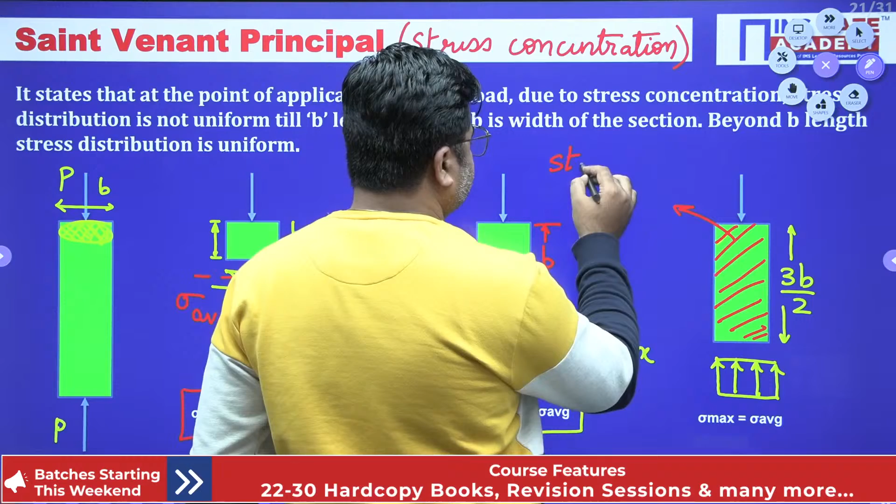What is stress concentration? When your stress is not uniform across the cross section, that is termed stress concentration.

Only when you have moved in by the amount of 3b by 2 inside the member from both ends, if this length is 3b by 2 and this length is also 3b by 2, then beyond this length, in this area, you will have uniform stress.

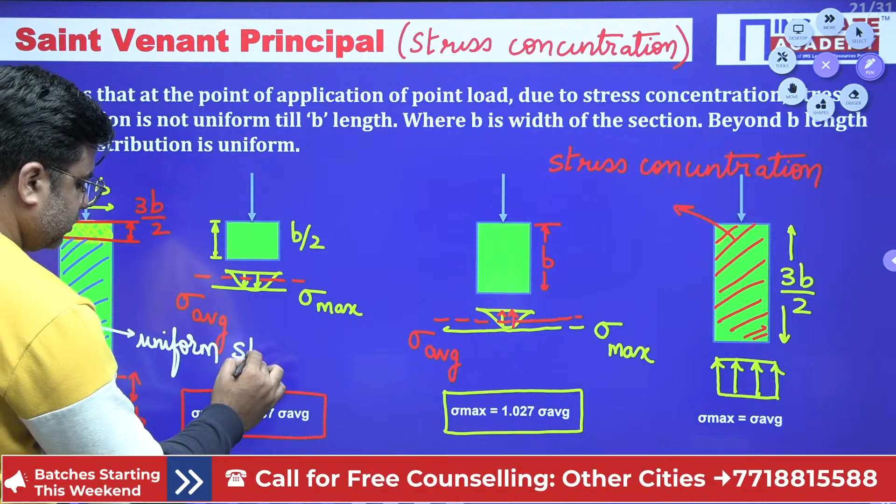And in these two areas, you will have stress concentration. This is what was explained by Sir Saint-Venant: in the areas up to length 3b by 2, where b is the width of the member, you will have stress concentration, and for the remaining part the stresses will be uniformly distributed.

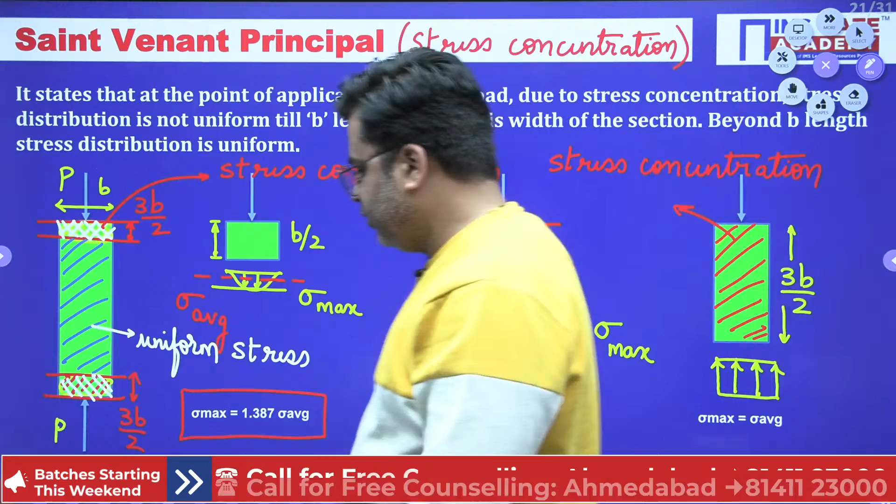I hope this is clear to you, and all these basics are clear to you. So these are the basics about stresses and strain.

In the next session, we will start with Hooke's law and check different numericals related to it, and we will see the different elastic constants and how Hooke's law is used to calculate shear stress and volumetric strain for different types of bodies. That is all for today.